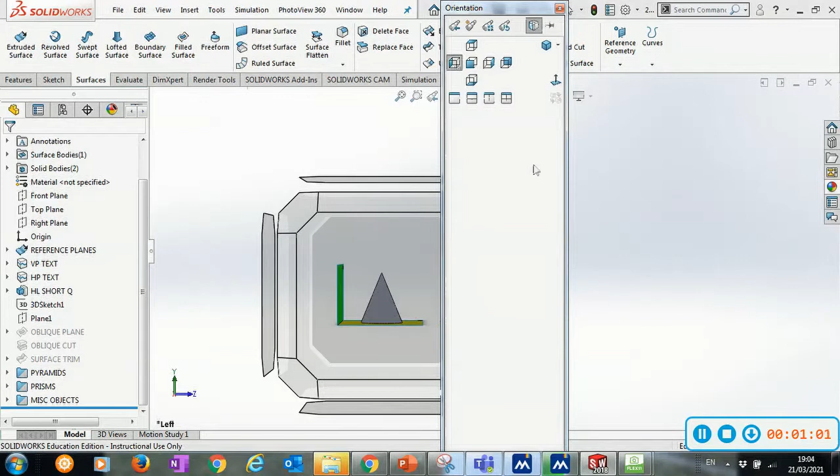So if we look here on the SolidWorks model, we can see here we have a cone, and it's an upright cone, where obviously the base of the cone is a circle, and when we look straight at the cone we see a triangle, and when we look at the cone from the top view we're going to see a circle. And I'll just go into my 3D view here, we have a cone, and we can see the vertical plane behind it and the horizontal plane underneath it.

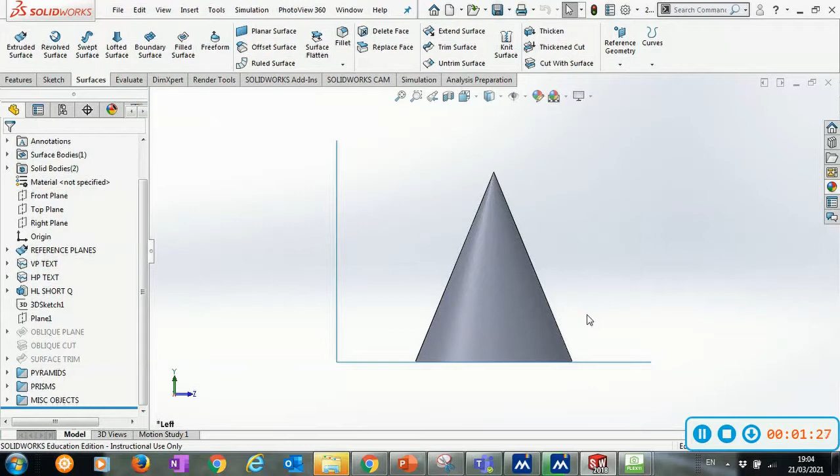So what we're actually going to be learning about is how an ellipse is created. I'm just going to go back to my right view there. An ellipse is created when a cone has been sliced at an angle. So I'm going to put in a little cutting plane here, a section view, and I'm going to rotate that section view, and you can see it's taking a little bit of the cone away, but I'll pull it back off.

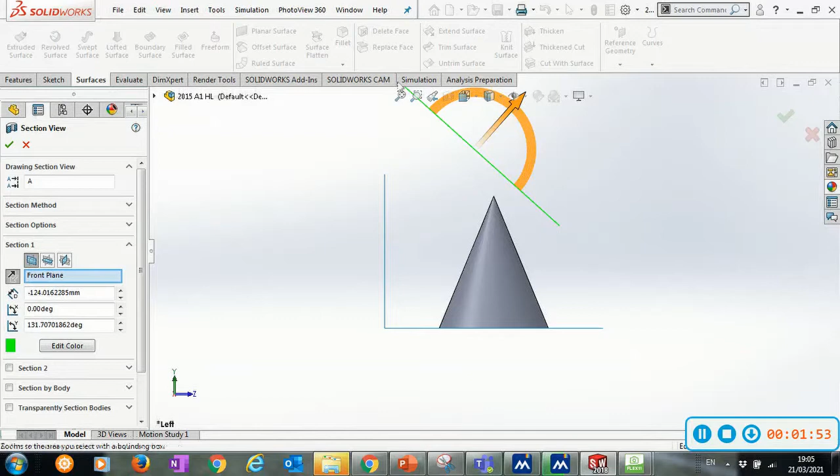So on that section view there, I've basically got this green line here which is at an angle, and I can change that angle to suit myself, it doesn't matter, but what's important to note is that the angle of the green line is different to the angle of the cone. So now I'm going to bring that cutting line, it's like I'm slicing the cone away from the top. You can see it's starting to disappear, and as I go further down, the cut is getting larger and larger. But if I go to the 3D view now,

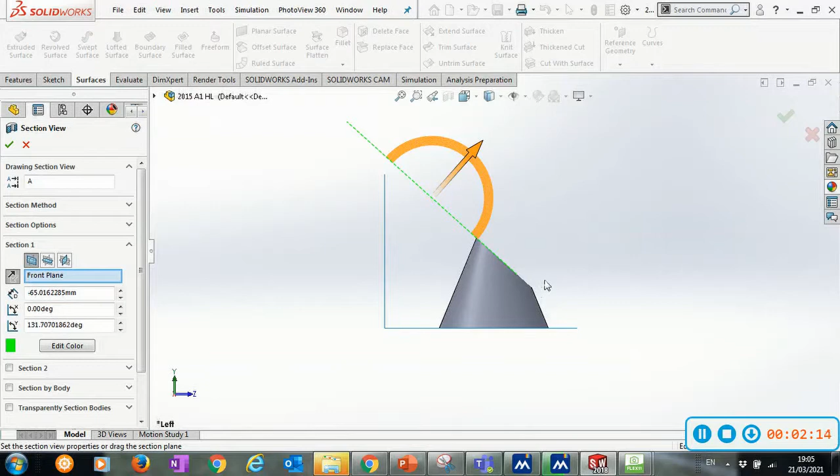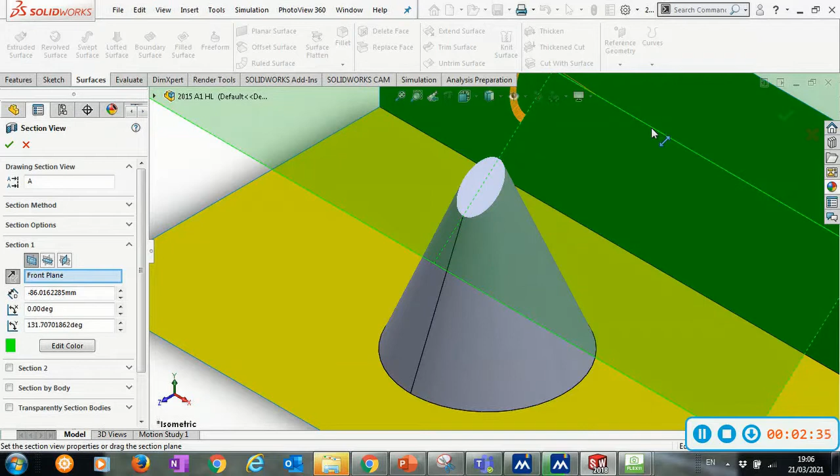what you'll actually notice is the shape made by that cutting plane, we've got this exposed area here, this cut surface. The shape that it actually generates is what's known as an ellipse, okay? So you can see here, if I bring the cutting plane away, the ellipse gets smaller, and if I bring it further down, the ellipse is going to get larger.

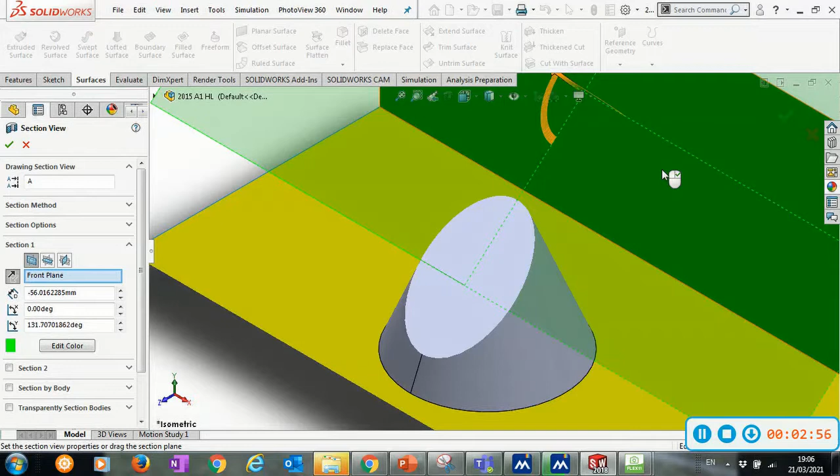So that depends on the size of the ellipse that we want to create, but essentially an ellipse is when you cut a cone at an angle. The angle cannot be parallel to the edge of the cone, and that's where we get the ellipse from. So as you can see, the ellipse is generated, and it can be a larger one or a smaller one, and it grows larger the further we travel down along the cone. So that's the ellipse shape we have there.

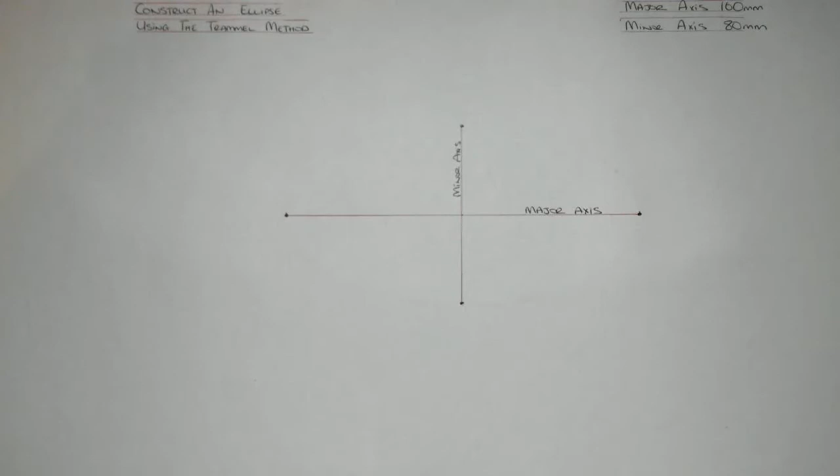Right folks, so in this video we're going to learn how to construct an ellipse using the Trammel method. In comparison to the other video where we constructed an ellipse using the auxiliary circles method, this one is just a little bit different. It's probably less commonly used than the auxiliary circles method, but just as effective.

So once again guys, you can see I've set up my axes. I've got a major axis here that is 160 millimeters long, and a minor axis running perpendicular to that, which is 80 millimeters long. So the major axis being 160 means the semi-major axis is 80, which is half of the major axis. So the semi-major axis is 80, the semi-minor axis is 40.

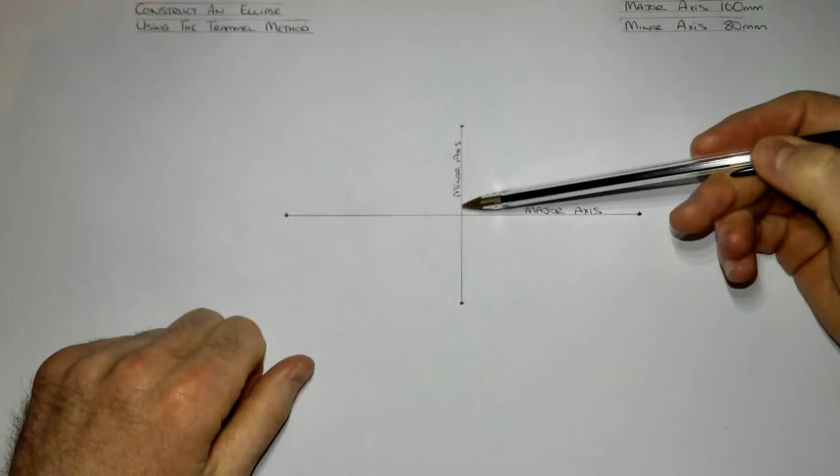So essentially 160's diameter, half of it is 80; minor axis diameter 80, half of it is 40. So for using the Trammel method, what you're going to need is to cut yourself a strip of paper. Just make sure that the paper is greater than half of the major axis, that's the main thing. You can just use your set squares to cut a scrap piece of paper, and we're going to use this paper to help us construct an ellipse.

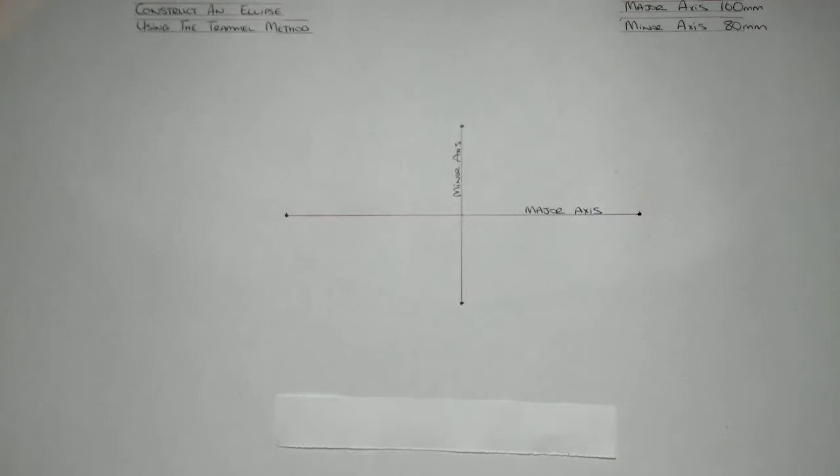First of all, what we have to note is that at either end of our major axis and minor axis, there are points on the ellipse. So this point here at the end of the major axis, and this one here, are points on the ellipse, and this point here and this point here are also points on the ellipse, which are at either end of the minor axis.

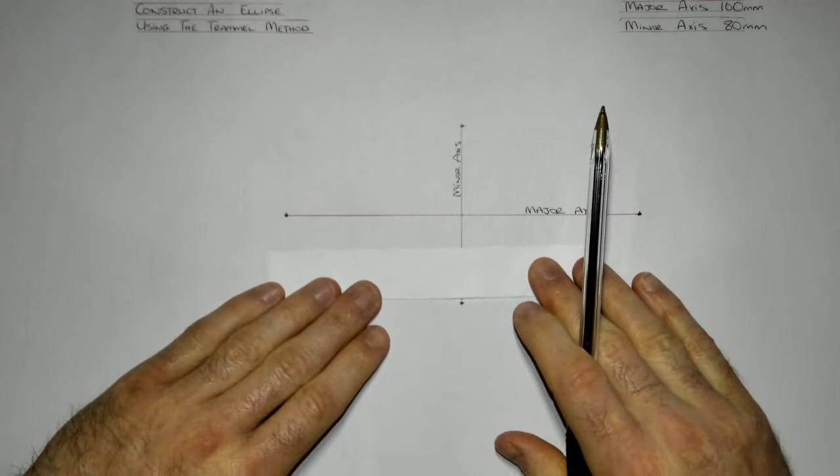So the method for using the Trammel method for constructing an ellipse is this. You take your scrap piece of paper and start off by putting it on the major axis line, something like that, and where the point of the ellipse is, right at the end of the major axis, I'm going to mark that on my paper. And I'm going to call that P.

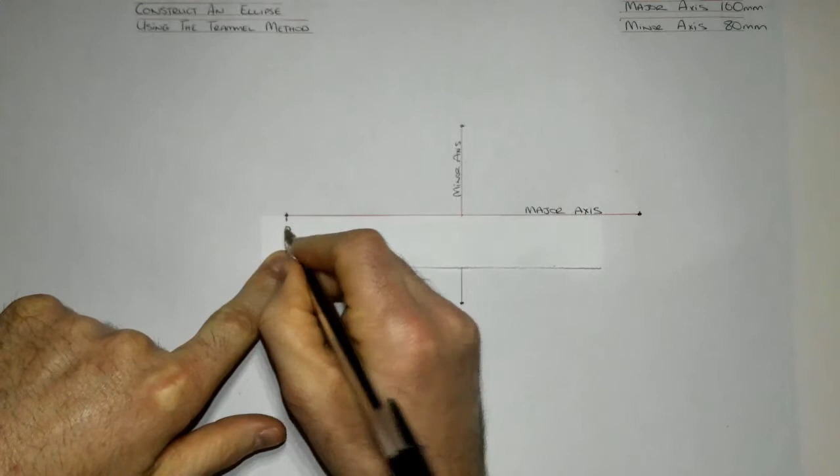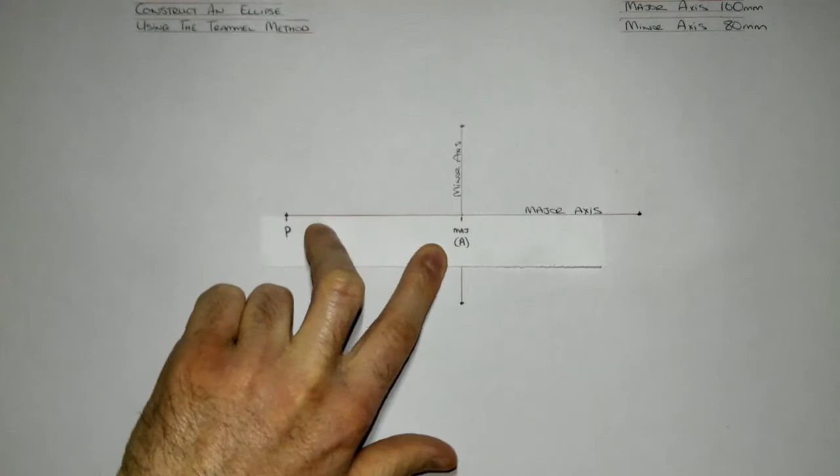What I'm also going to mark from P is the center of the major axis, which is right there. And I'm going to mark that MAJ, or if you wanted, you could call it A. So the distance from P to the center of the major axis, that is the first one I'm going to mark.

For the next one, I'm going to put P, because remember P is once again a point on the ellipse, at the top of the minor axis, which is up here. Make sure it's exactly on it. I'm going to once again mark into the center, only this time the center of the minor axis, right there. Make sure you're 100% accurate with it. Just about there, happy with that.

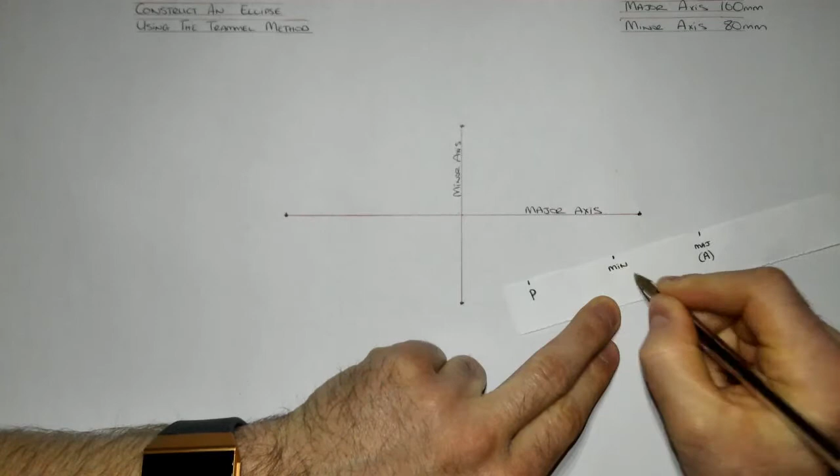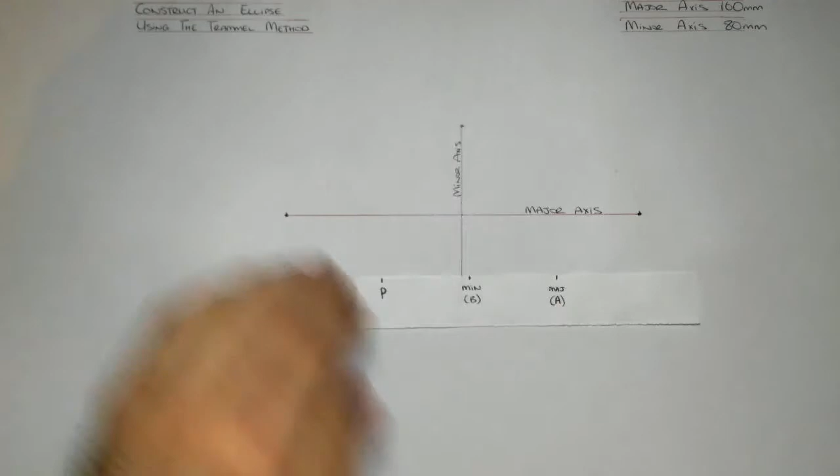And then I'm going to write in minor, or in this case, M-I-N. Or if you wanted to just use a letter, you could use B. That's going to help us draw a portion of our ellipse. At this point, if you wanted, you could take your set square and just cut off the excess. And what we have is our Trammel set up.

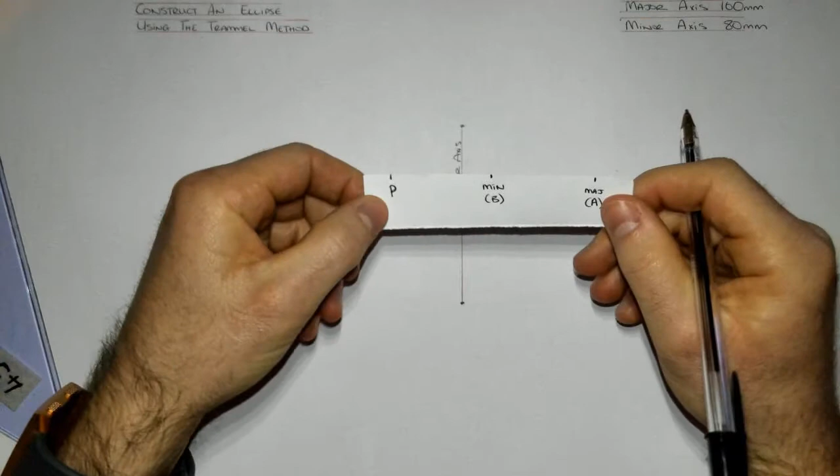For the P at the start, I would always mark it in a little bit from the end of the piece of paper. I wouldn't usually keep it at the end. Now, the method for drawing in the ellipse using the Trammel method is quite a simple one. We're going to plot points that are on the elliptical curve by using both the minor and the major.

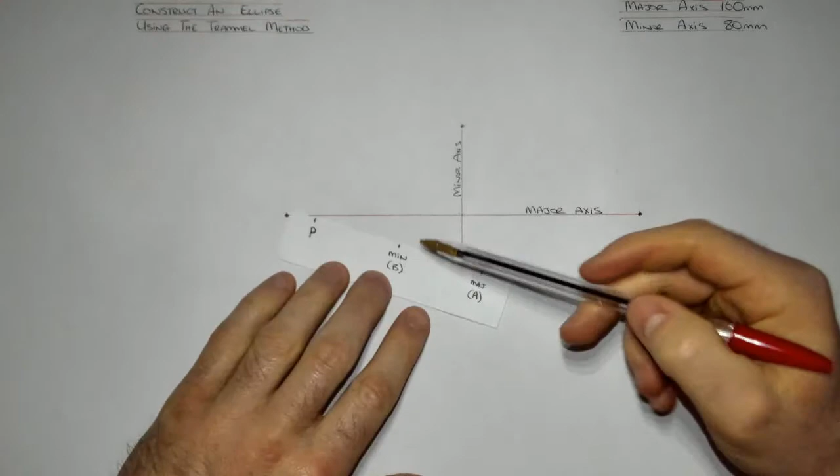To find a point on the curve, there's a little bit of technique in this. The major axis point, which is A, I'm going to keep going along the minor axis line, which goes up and down like this. So A always has to stay on it, and likewise the minor axis point always has to stay on the major axis. I'll do it a little bit closer. I'm going to work down this length to get this portion up here. So the major axis point is along the minor axis line.

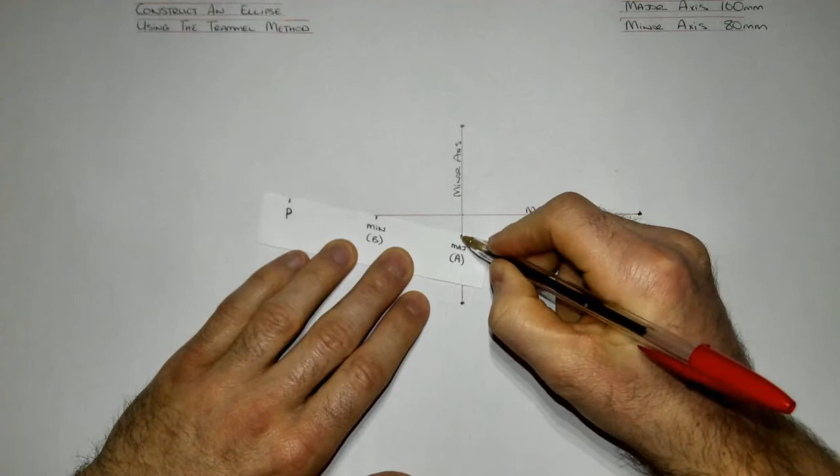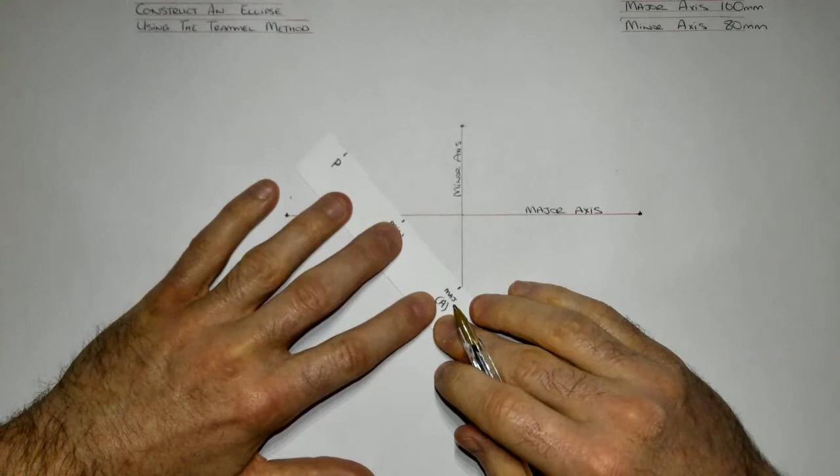Okay, the minor axis point is along the major axis line, and that there gives me a point on the curve right here. So I'd mark that there. Okay, now you can see I found a point here. So what I want to do is find a series of points all the way along it. So to find another one, I'm going to move it further down, find maybe 3, which should help me. So about there, happy with that.

The major axis point, I should say, is along the minor axis line, and the minor axis point is along the major axis line. That there gives me another one. Okay, and then finally you can see here I found 2 of them. I'm going to find one more up about here, so I'll go further down.

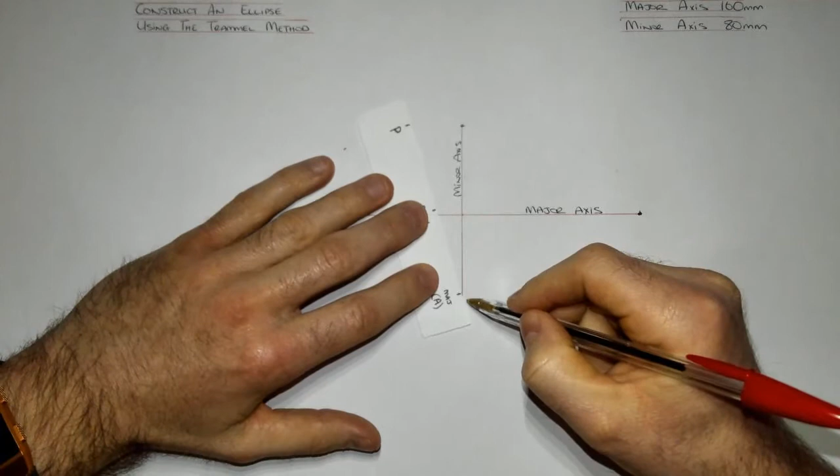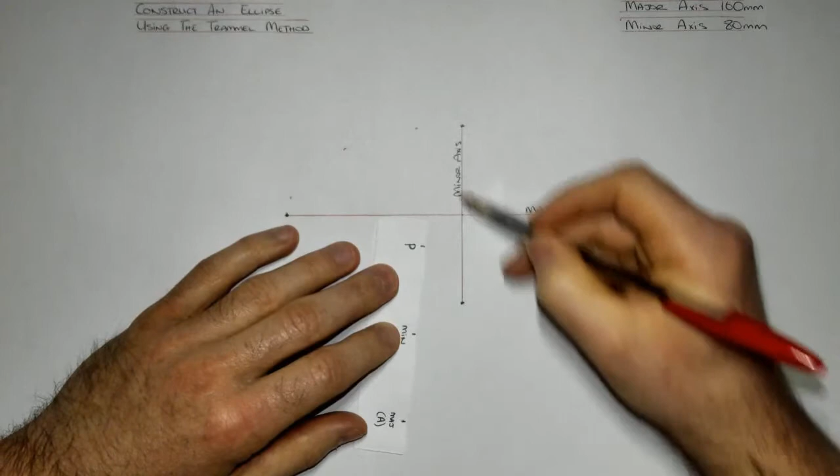So major axis point, a little bit, maybe about here. Quite happy with that. So right there and there, you can see I'm lined up with it, and I found another point. Okay, and now I'm going to continue it on the opposite side. So I found 3 points there. Okay, so same thing, make sure it's on it here. Happy with that.

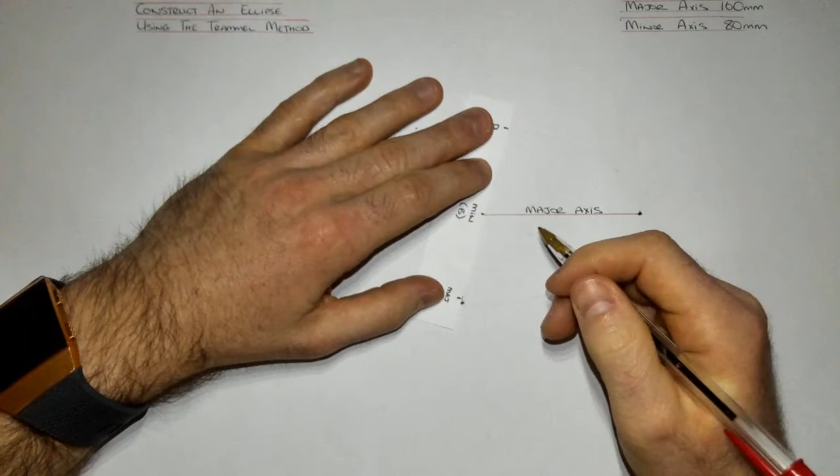I'll rotate it until it's in position. So I'm quite happy with that there. That gives me another point right here, and going to do the same. And you can see here it's just going to keep working its way around. It's just a little bit of practice and technique. That'll give me another point over here. Probably went a little bit far there, so I'm going to try and find one in the middle now. So there's another one.

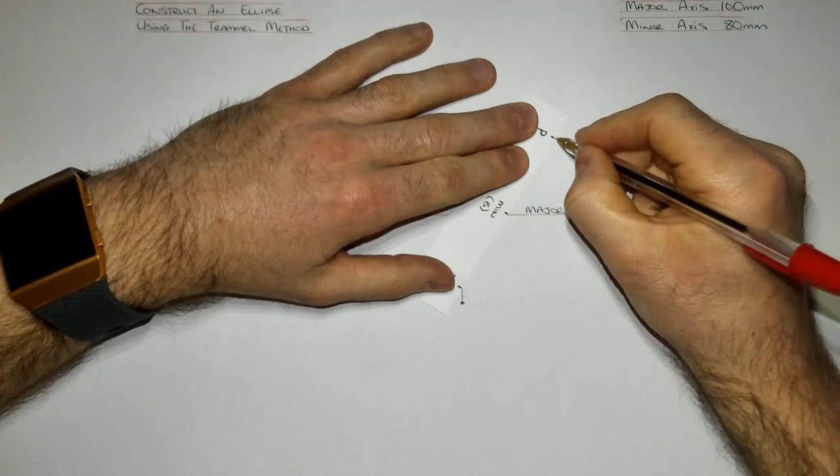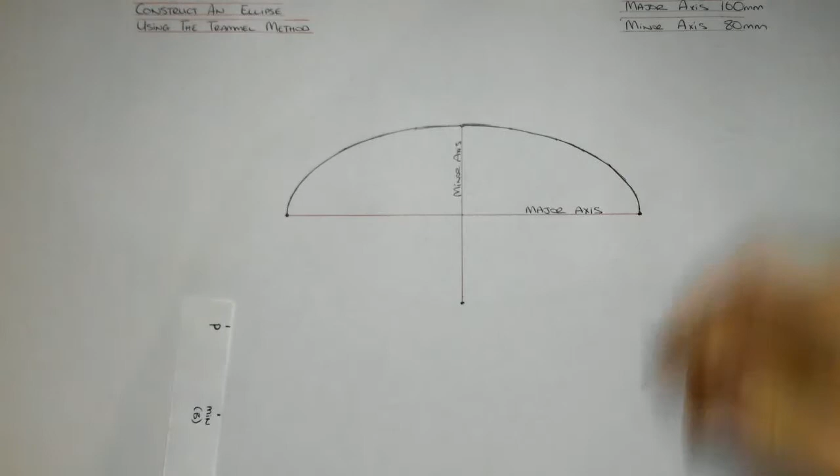Okay, and as you can see there, I found a series of points. Now I can actually plot my curve. So I'll sketch that in there now quickly, so I'll speed up the video. Okay, so there we have it. That is the top portion of our ellipse. Now what we have to do is find the bottom portion.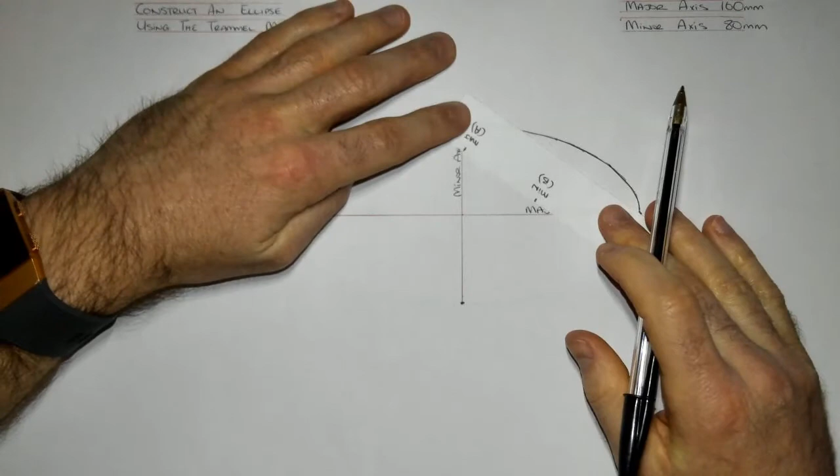So applying the same method, like we did here where the major axis was on the minor, we just do the same, only going upside down. So I'm going to keep the major axis point along the minor axis line and the minor axis point along the major axis line. Okay, so just finding them there. Start by finding one that's close enough to it. So about here, I'm happy with that. That gives me a point on the curve there.

Then I'll move it up a little bit and down a little bit. So major axis point is on the minor axis. The minor axis point is on the major axis. There gives me another point. Another point. I'll keep moving this. Another point. And finally, there's one more. You can see the path of the points. Okay. And going to do the same then going in this direction.

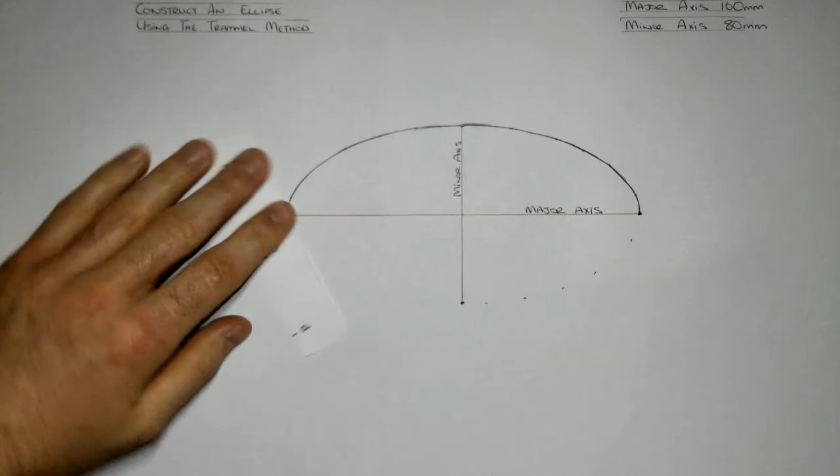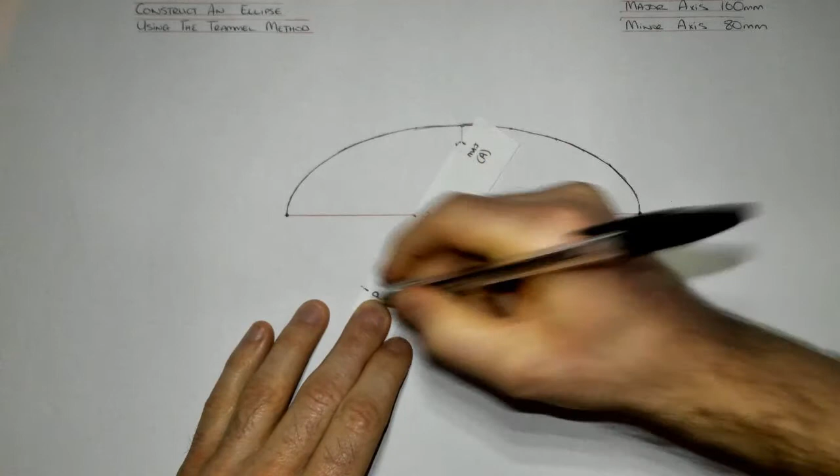There's another point. Point. Keep continuing on with this process where the major axis point is on the minor axis line and the minor axis point is on the major axis line. And then finally the last one that I think I'll need, about there. I'm happy with that. Yep. Okay. And once again, quickly going to sketch that, so I'll speed up the video.

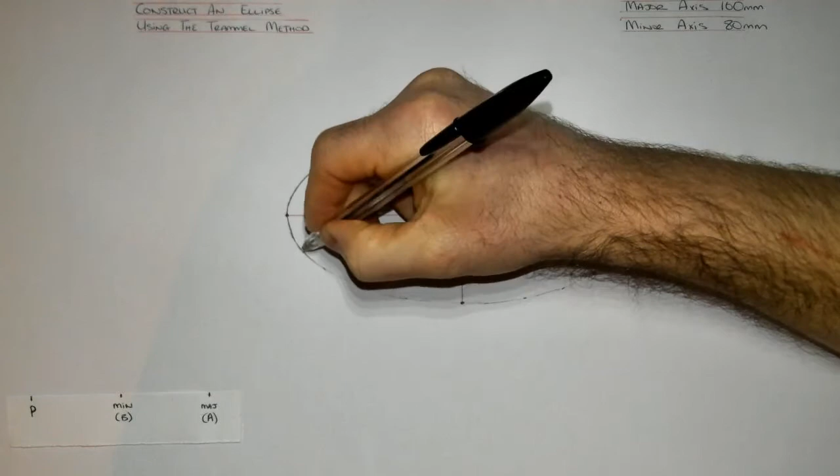Right folks, so there you have it. That there is how you construct an ellipse using the Trammel method. You're just going to need a piece of paper, and at the very start you're going to note a point that's on the curve, so either end of the major axis, to start off with, and from that point to the center of the major axis gives you point A, and then you can rotate it until it's at either end of the minor axis to locate from there to the center, which will give us point B.

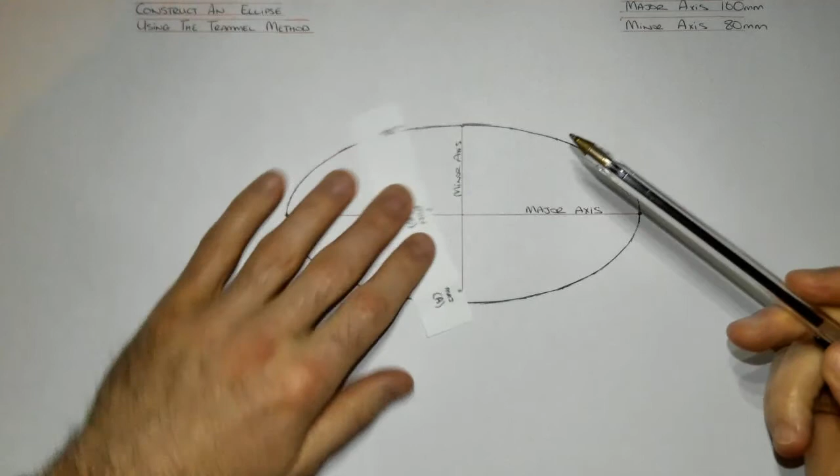And then we literally make sure that A and B are along the major and minor axes, and we can plot our curve around. And as you can see there, it follows that path, and it continues the whole way around. So that there, guys, is using the Trammel method to construct an ellipse. Okay.